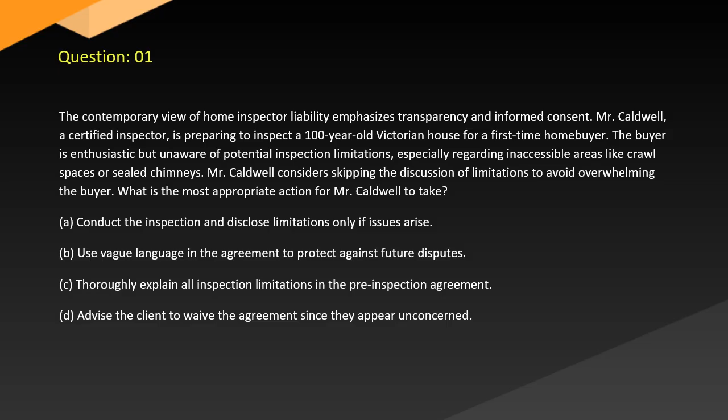Mr. Caldwell considers skipping the discussion of limitations to avoid overwhelming the buyer. What is the most appropriate action for Mr. Caldwell to take? A. Conduct the inspection and disclose limitations only if issues arise. B. Use vague language in the agreement to protect against future disputes. C. Thoroughly explain all inspection limitations in the pre-inspection agreement. D. Advise the client to waive the agreement since they appear unconcerned.

Answer: Correct answer C. Explanation: Home inspectors must clearly outline limitations in the pre-inspection agreement. ASHI-SOP Section 2. Transparency reduces liability and ensures informed client decisions. Avoiding or downplaying this step, even with enthusiastic clients, is unethical and could lead to legal disputes.

Courts often reject vague disclaimers or failure to communicate risks. See Interstate Home Inspections v. Jones 2020. Clients cannot waive protections unknowingly.

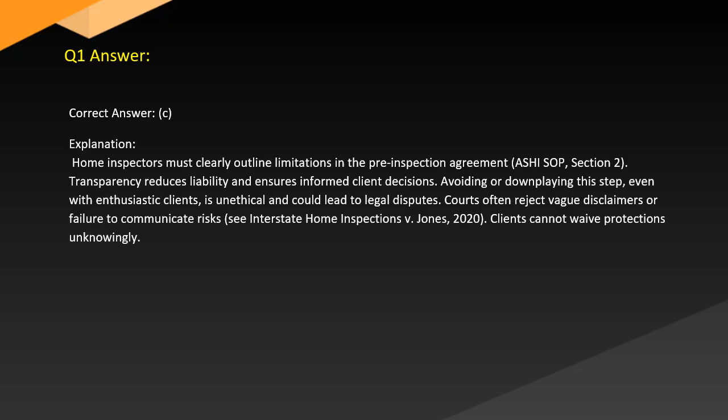Question 2. Upon closer examination, a home inspector finds an asphalt shingle roof with uneven wear patterns, curling shingles, and moss growth. Ventilation appears insufficient and the attic is unusually warm and moist. What is the most likely underlying issue contributing to premature roof deterioration?

A. Flashing failure near the chimney. B. Inadequate attic ventilation causing heat and moisture buildup. C. Improper slope causing water pooling. D. Overuse of roof cement during prior repairs.

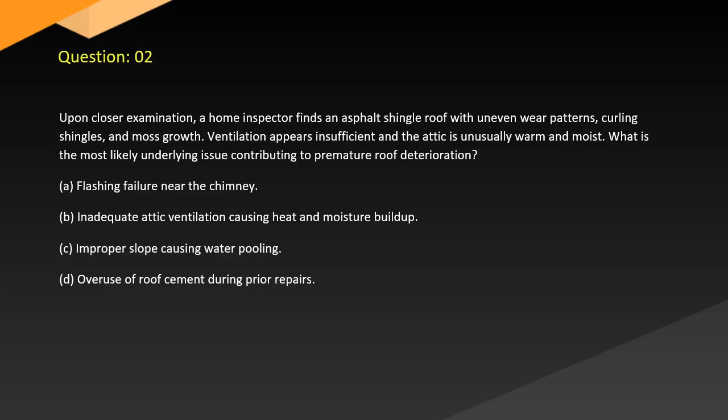Answer: Correct answer B. Explanation: Improper ventilation leads to heat and moisture retention in the attic, which damages shingles from beneath. According to the International Residential Code, proper ventilation is critical for roof longevity. Flashing or pitch issues cause leaks, but not widespread wear. Excessive moss is often a symptom, not the cause. Heat buildup accelerates aging of asphalt materials.

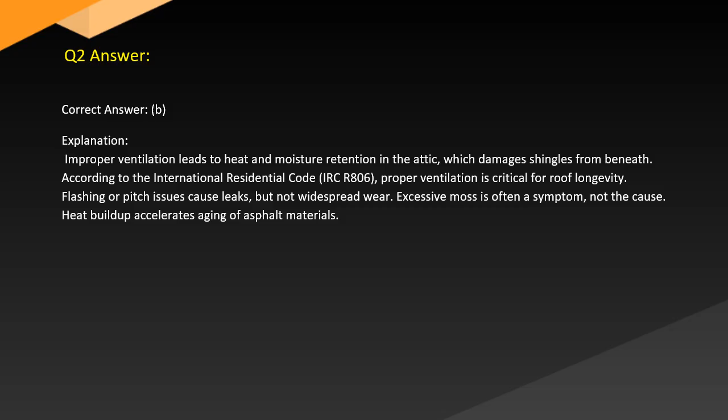Question 3. While examining a utility room, Inspector Lewis notices that the gas water heater lacks a temperature and pressure relief valve (TPR) discharge pipe. The client asks if this is a serious issue. What should Inspector Lewis explain?

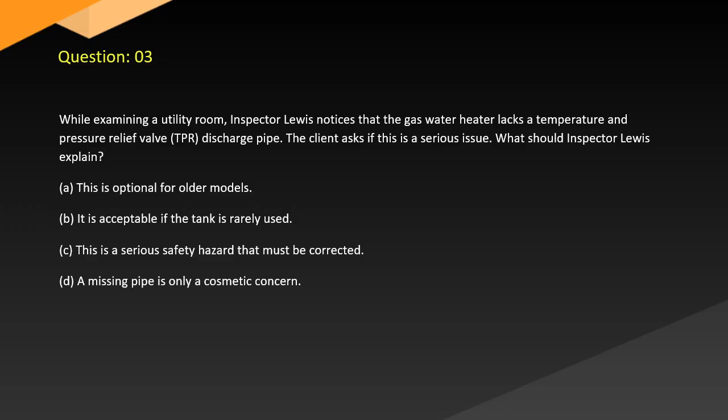A. This is optional for older models. B. It is acceptable if the tank is rarely used. C. This is a serious safety hazard that must be corrected. D. A missing pipe is only a cosmetic concern.

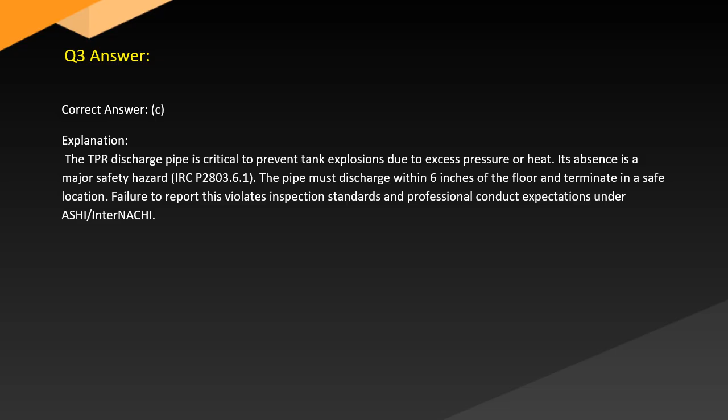Answer: Correct answer C. Explanation: The TPR discharge pipe is critical to prevent tank explosions due to excess pressure or heat. Its absence is a major safety hazard. Per code, the pipe must discharge within 6 inches of the floor and terminate in a safe location. Failure to report this violates inspection standards and professional conduct expectations under ASHI and InterNACHI.

Question 4. From multiple perspectives, horizontal cracking in a basement's concrete block foundation accompanied by inward bulging raises concerns. Inspector Patel suspects hydrostatic pressure. Which of the following should be included in his report?

A. Advise cosmetic repairs such as patching. B. Recommend immediate consultation with a structural engineer. C. Suggest regrading only and monitor annually. D. State that the foundation appears typical for its age.

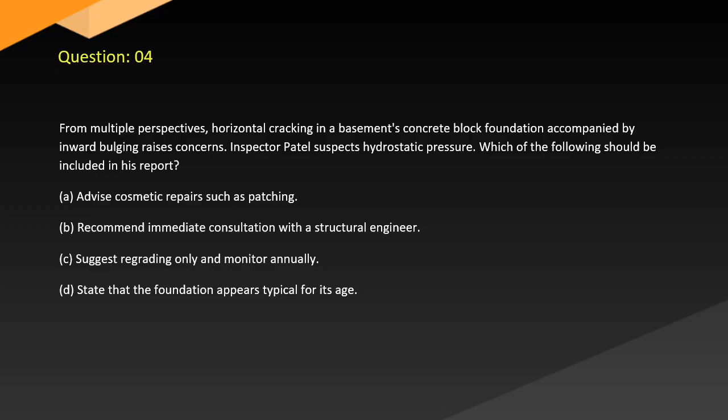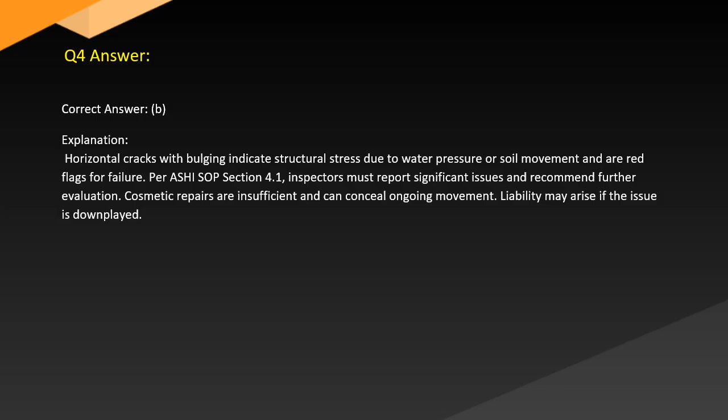Answer: Correct answer B. Explanation: Horizontal cracks with bulging indicate structural stress due to water, pressure, or soil movement and are red flags for failure. Per ASHI-SOP Section 4.1, inspectors must report significant issues and recommend further evaluation. Cosmetic repairs are insufficient and can conceal ongoing movement. Liability may arise if the issue is downplayed.

Question 5. To determine whether combustion appliances are functioning safely, Inspector Gomez tests carbon monoxide levels near a gas furnace. The levels are elevated despite visible blue flames. What does this suggest? A. The furnace is operating normally.

B. There may be incomplete combustion and poor venting. C. The blue flame ensures no CO is produced. D. Carbon monoxide alarms should not be relied on for testing.

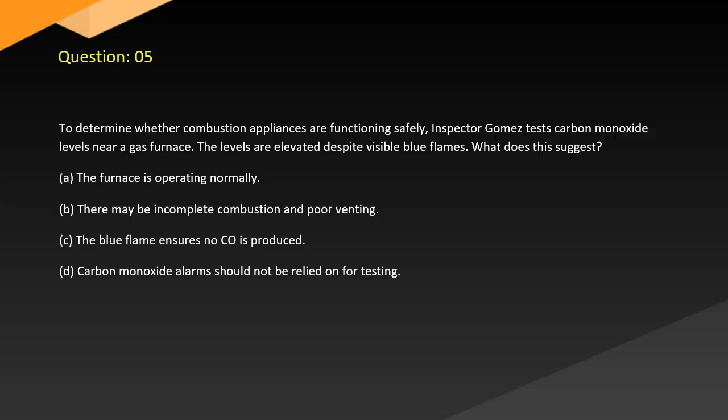Answer: Correct answer B. Explanation: Even blue flames can conceal incomplete combustion. Elevated CO suggests a malfunction or venting issue. According to the U.S. Consumer Product Safety Commission and the EPA, any level above 9 ppm indoors is concerning. Home inspectors must report suspected CO hazards and advise prompt servicing per ASHI Code of Ethics.

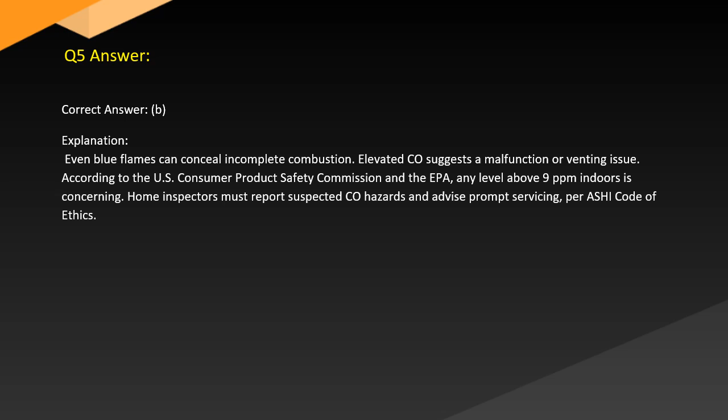Question 6. In the absence of visible cracks, Inspector Angela notes ponding water and reverse grading around the home's perimeter. What should she recommend to the client?

A. Since there are no cracks, no concern is warranted. B. Recommend regrading to slope soil away from the foundation. C. Install gutters only if flooding occurs. D. Monitor the area seasonally without immediate action.

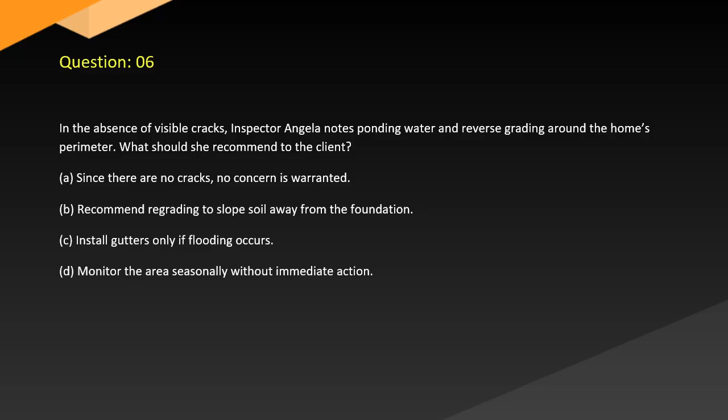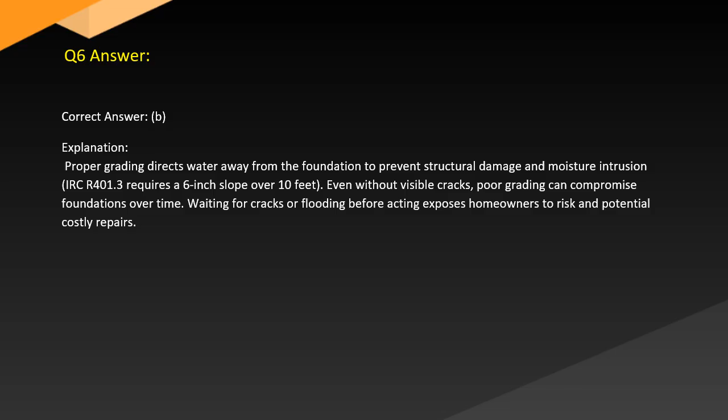Answer: Correct answer B. Explanation: Proper grading directs water away from the foundation to prevent structural damage and moisture intrusion. Code requires a 6-inch slope over 10 feet, even without visible cracks. Poor grading can compromise foundations over time. Waiting for cracks or flooding before acting exposes homeowners to risk and potential costly repairs.

Question 7. The fundamental question is whether Inspector Mehta breached his duty by failing to report a missing handrail on steep stairs, which later caused injury. The inspection report stated, 'stairs appear generally functional.' How might liability be assessed?

A. Inspector is not liable if injury occurred after inspection. B. Inspector met minimum reporting standards. C. Inspector may be liable for omitting clear safety hazard. D. No liability since client accepted the report.

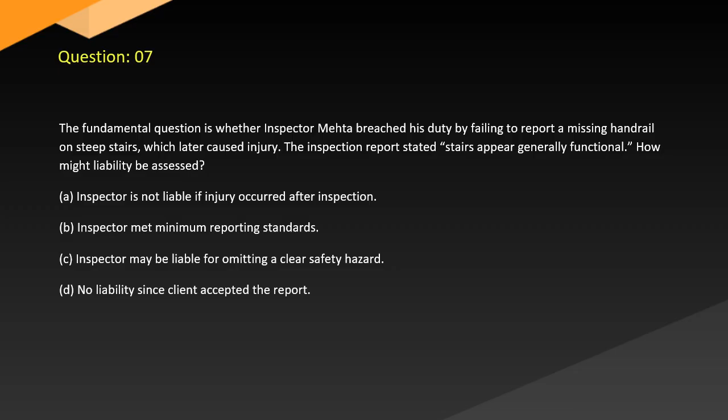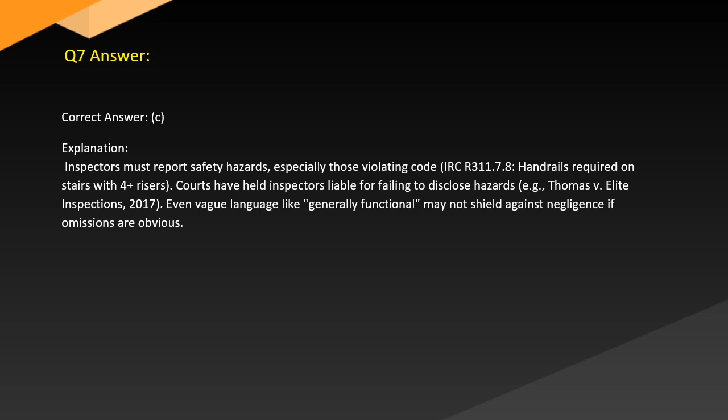Answer: C. Inspectors must report safety hazards, especially those violating code IRC R311.7.8, which requires handrails on stairs with 4 or more risers. Courts have held inspectors liable for failing to disclose hazards, e.g. Thomas v. Elite Inspections, 2017. Even vague language like 'generally functional' may not shield against negligence if omissions are obvious.

Question 8. Throughout the course of a panel inspection, Inspector Daniel observes double-tap breakers and mixed aluminum and copper wiring under the same terminal. What is the correct course of action?

A. Recommend a licensed electrician evaluate the panel. B. Ignore it if the panel shows no signs of overheating. C. Replace only the aluminum wires immediately. D. Tighten the connections and close the panel.

Answer: A. Double tapping can lead to overheating if breakers aren't rated for two wires. Mixing aluminum and copper can cause galvanic corrosion without proper connectors. NEC 110.14 requires compatibility in terminations. Only a licensed electrician should evaluate and correct such potentially hazardous installations. Ignoring them may pose fire risks.

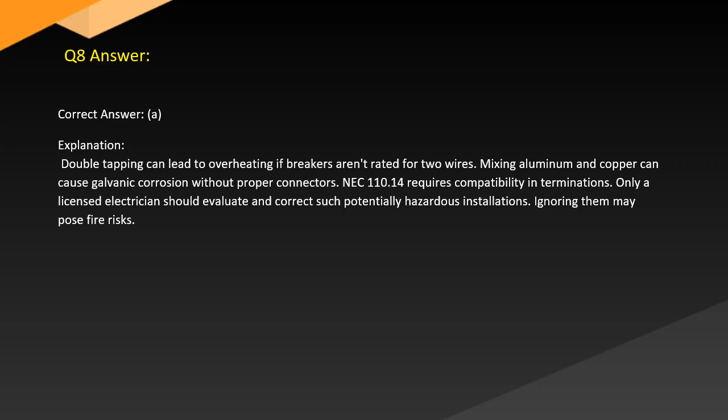Question 9. As evidenced by stained drywall, musty odor, and warped baseboards, Inspector Jordan suspects mold in a poorly ventilated bathroom. The client insists it's just age-related wear. What should Inspector Jordan do?

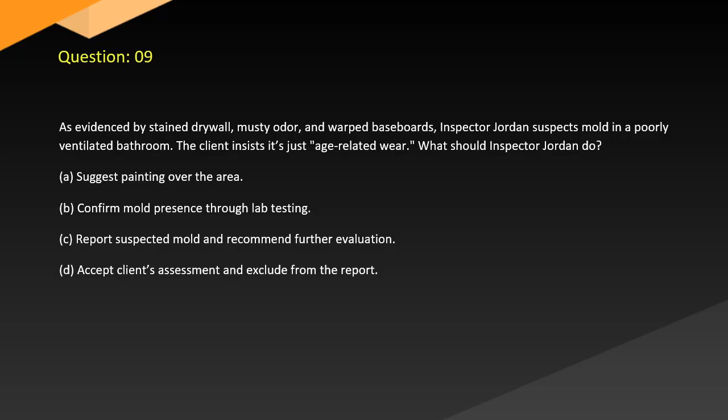A. Suggest painting over the area. B. Confirm mold presence through lab testing. C. Report suspected mold and recommend further evaluation. D. Accept client's assessment and exclude from the report.

Answer: C. Inspectors must report visible signs of potential mold and recommend further evaluation, per EPA Guidance and ASHI SOP Section 9. Testing is outside scope unless separately certified. Mold can cause serious health and structural issues. Suggesting cosmetic fixes violates ethical standards and may increase inspector liability.

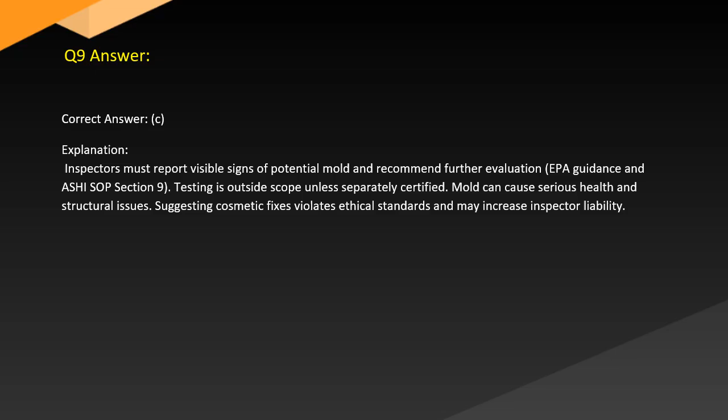Question 10. Given the circumstances of a newly remodeled kitchen, Inspector Lauren finds the garbage disposal is wired directly to a circuit with no switch or visible disconnect. The client asks if this is acceptable. What is the appropriate response?

A. Direct wiring is allowed if the unit is new. B. Disposal units can be wired without switches. C. Lack of a disconnect is a safety violation. D. It only matters if the unit is malfunctioning.

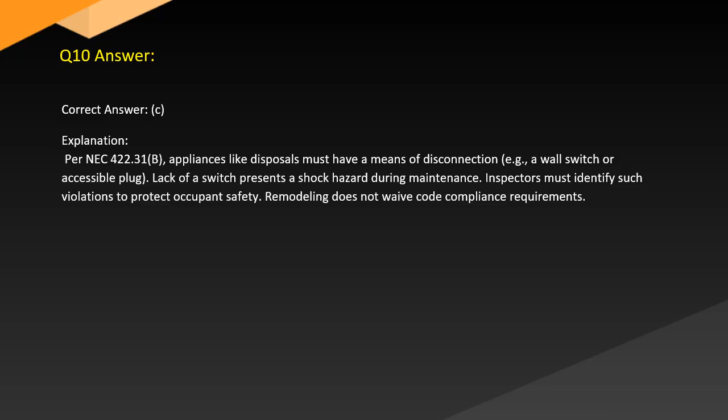Answer: C. Per NEC 422.31(B), appliances like disposals must have a means of disconnection, such as a wall switch or accessible plug. Lack of a switch presents a shock hazard during maintenance. Inspectors must identify such violations to protect occupant safety. Remodeling does not waive code compliance requirements.

Question 11. In a modern context of structural renovations, Inspector Wallace evaluates a home where several first-floor walls have been removed. The homeowner claims the renovation was done by a friend and no permits were pulled. Upon inspection, Wallace notices signs of floor sagging and unsupported beams in the basement directly beneath the removed walls. What is the most appropriate recommendation for Wallace to include in his report?

A. Suggest monitoring the area over the next few months. B. Note that cosmetic repairs may be necessary. C. Advise immediate evaluation by a qualified structural engineer. D. Recommend reinforcing the flooring with plywood.

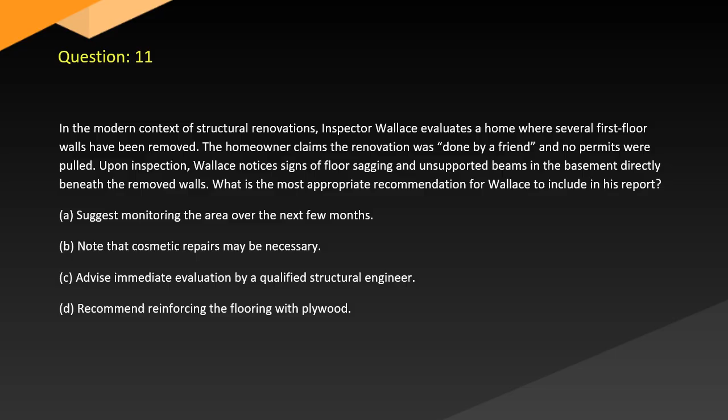Answer: C. Removal of load-bearing walls without proper engineering support is a serious structural concern. Floor sagging and unsupported beams suggest compromised integrity. ASHI requires inspectors to report conditions that significantly affect structural performance. IRC R301.1 mandates that load paths must be maintained. A structural engineer must assess this immediately; monitoring is not a substitute for professional evaluation.

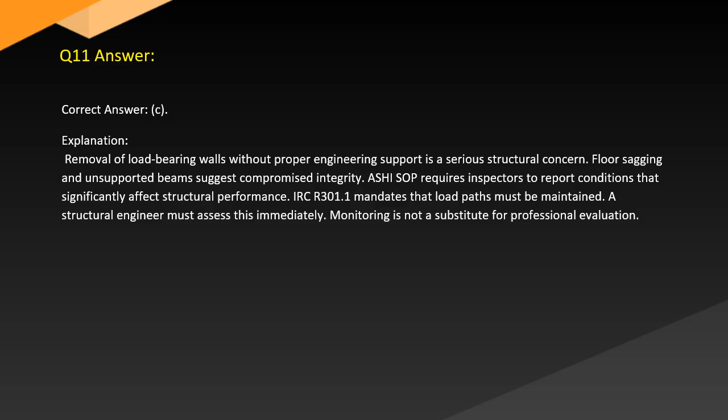Question 12. By evaluating a two-story home during a summer inspection, Inspector Tanya notes excessive heat in the attic and minor ceiling stains below. The attic has no visible soffit or ridge vents, and the bathroom exhaust fan vents directly into the attic. What is the most significant concern here?

A. Energy loss through ceiling insulation. B. Inefficient cooling of the living area. C. Risk of mold and moisture damage in the attic. D. Heat affecting the roof shingles.

Answer: C. Lack of proper attic ventilation and exhaust fan venting into the attic introduces excessive moisture, creating an ideal environment for mold growth and wood rot. IRC Section M1501.1 requires exhaust systems to discharge outdoors. ASHI obligates the inspector to report inadequate ventilation. Ceiling stains may indicate condensation-related damage, not leaks. This is a health and building integrity risk.

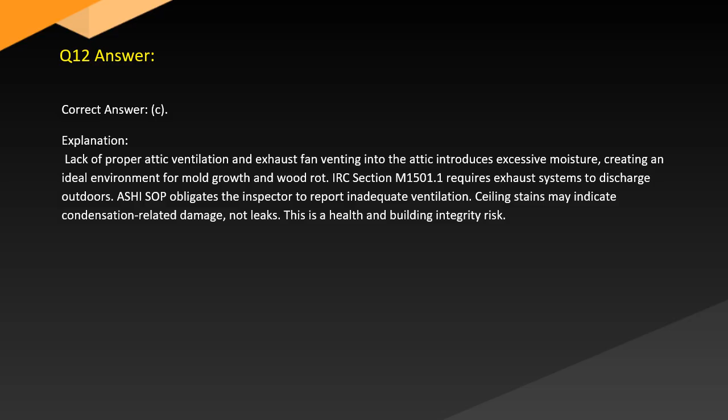Question 13. Contrary to popular belief, cracks in a brick veneer wall over a garage arch are not always cosmetic. Inspector Rena observes stair-step cracks extending upward from a garage door corner and separation between the veneer and window casing. The foundation appears stable, but the client asks if it's just normal settling.

What should Rena conclude in her report? A. Cracks are typical in all homes and not concerning. B. Recommend repointing the mortar only. C. Advise evaluation for structural shifting or lintel failure. D. Suggest repainting the area to conceal the defect.

Answer. Correct answer C. Explanation: Stair-step cracks and veneer separation may suggest underlying structural issues like lintel failure or shifting loads. Even without foundation issues, veneer cracking can reflect stress. ASHI requires noting visible defects that may indicate structural concerns; concealing the damage or labeling it normal without evaluation may breach professional responsibility.

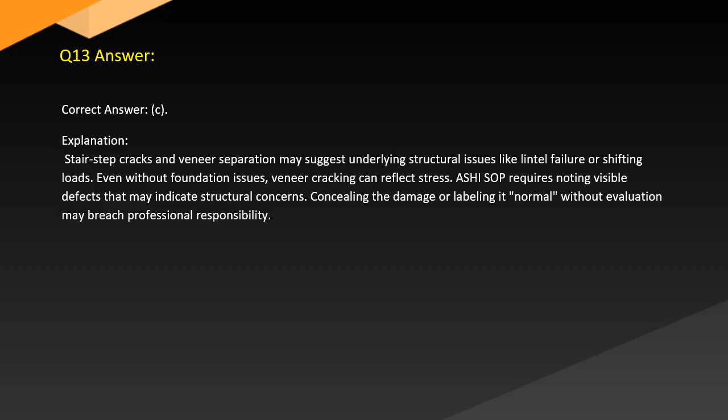Question 14. From a practical standpoint, Inspector Omar evaluates a masonry fireplace with white powdery residue on the exterior chimney and damaged mortar joints. The homeowner claims it's just dust from the bricks, but what does the residue most likely indicate, and what action should Omar recommend?

A. Efflorescence due to water penetration - recommend chimney inspection. B. Mold growth - recommend pressure washing. C. Paint flaking - suggest repainting the chimney. D. Normal discoloration with no further action required.

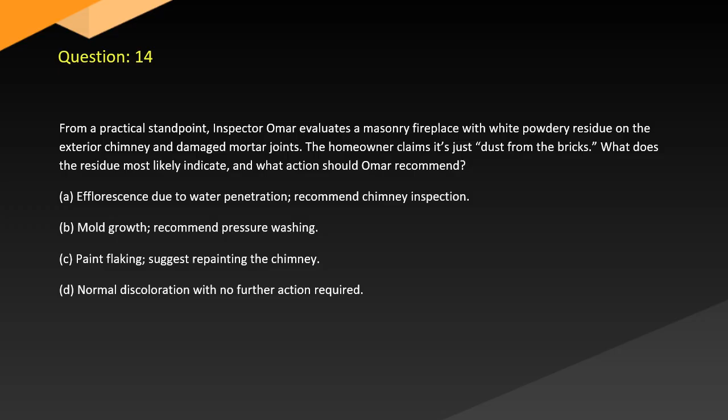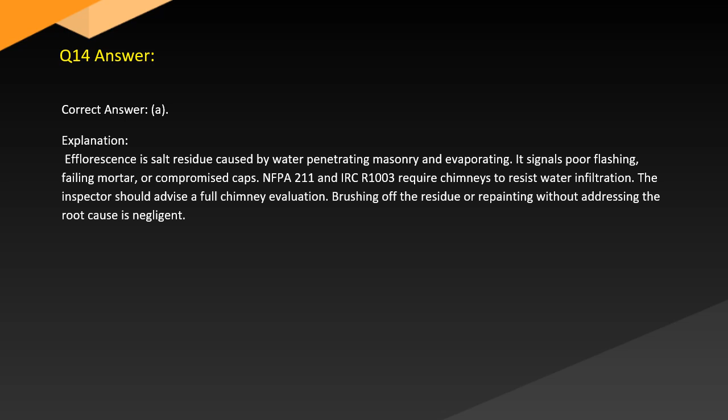Answer. Correct answer A. Explanation: Efflorescence is salt residue caused by water penetrating masonry and evaporating. It signals poor flashing, failing mortar, or compromised caps. NFPA 211 and IRC R1003 require chimneys to resist water infiltration. The inspector should advise a full chimney evaluation. Brushing off the residue or repainting without addressing the root cause is negligent.

Question 15. In response to a client request for infrared imaging, Inspector Grace explains she does not offer thermographic inspection but performs a visual-only inspection. The client insists on checking wall moisture. What is the best course of action for Grace?

A. Use a flashlight and guess based on visible signs. B. Offer to rent a camera to accommodate the client. C. Clarify limitations and refer to a specialized thermographer. D. Decline the inspection entirely.

Answer. Correct answer C. Explanation: ASHI requires inspectors to state the scope and limitations of their services clearly. If infrared or moisture detection tools aren't part of her standard practice, Grace must explain that and refer the client to someone with that expertise. Providing misleading information or guessing could create liability issues. Documentation is key to avoiding disputes.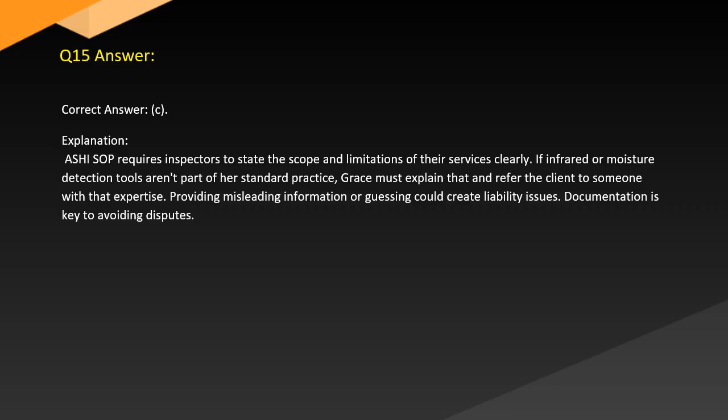Question 16. During the process of inspecting a finished basement, Inspector Naomi notes a damp odor, discoloration at baseboards, and minor drywall bubbling. The client mentions a previous water intrusion that was professionally dried. Naomi has no moisture meter.

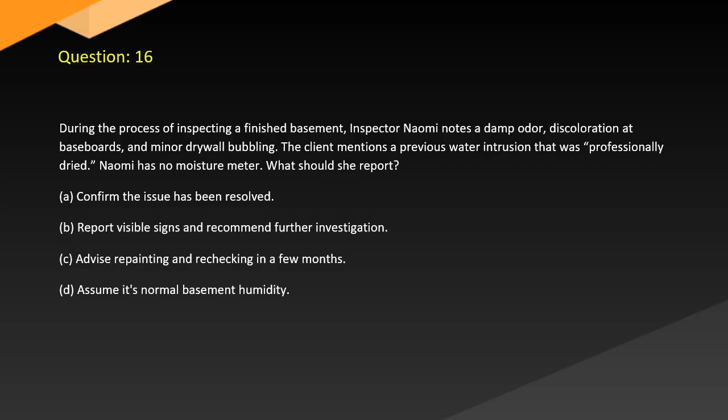What should she report? A. Confirm the issue has been resolved. B. Report visible signs and recommend further investigation. C. Advise repainting and rechecking in a few months. D. Assume it's normal basement humidity.

Answer. Correct answer B. Explanation: Even without a moisture meter, visible and olfactory signs like staining, bubbling, and odor warrant reporting. ASHI SOP directs inspectors to document observed conditions and recommend further evaluation where appropriate. Ignoring signs of past or ongoing moisture intrusion exposes clients to mold and health risks. It's inappropriate to confirm the issue is resolved without verification.

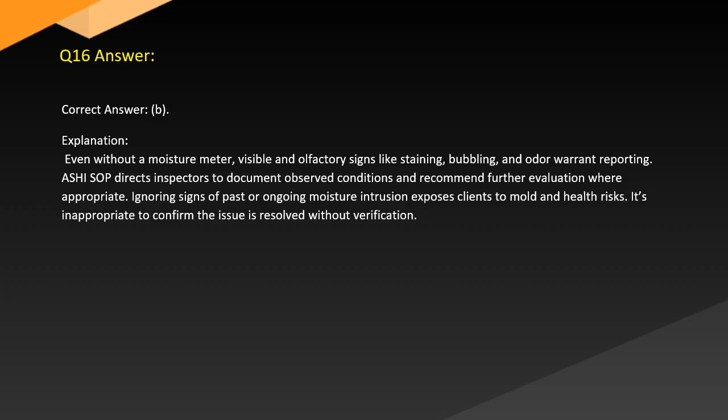Question 17. Across different scenarios, homes built before 1960 often lack grounded outlets. Inspector Allen finds multiple ungrounded three-prong outlets during an inspection of a 1958 home. What should Allen communicate in his report?

A. The outlets meet code for the time of construction and need no comment. B. Ungrounded three-prong outlets should be labeled and/or upgraded for safety. C. Recommend full rewiring of the house. D. No action is required unless devices malfunction.

Answer. Correct answer B. Explanation: Installing three-prong receptacles without proper grounding is misleading and unsafe. NEC 406.4D requires ungrounded three-prong outlets to be GFCI protected and labeled 'no equipment ground.' Inspector should recommend corrections for safety and code compliance. Full rewiring may not be necessary, but upgrading outlet safety is.

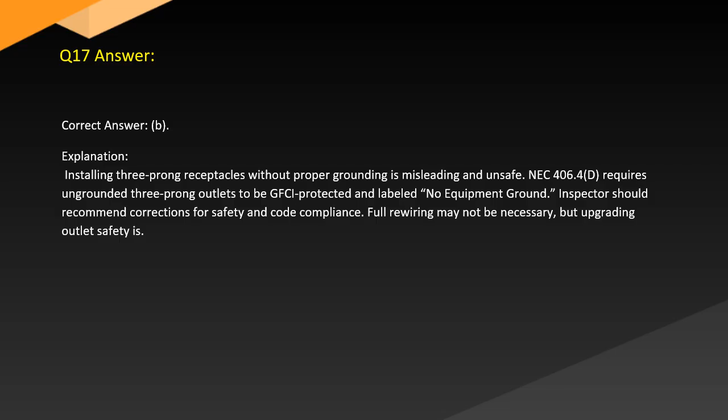Question 18. A critical examination of an in-ground pool reveals that there is no pool barrier or self-latching gate around the backyard. The homeowner says their area doesn't enforce pool safety laws. What is the appropriate inspector response?

A. Ignore it since it's not enforced locally. B. Report the lack of barrier as a significant safety hazard. C. Recommend signage instead of fencing. D. Suggest adding pool cover only.

Answer. Correct answer B. Explanation: Regardless of enforcement, inspectors must report life safety issues. The IRC Appendix G and many state laws require barriers and self-latching gates to prevent child drownings. A lack of a pool barrier is a major hazard. Pool covers are supplementary. Failing to report such risks could result in liability for the inspector in case of an incident.

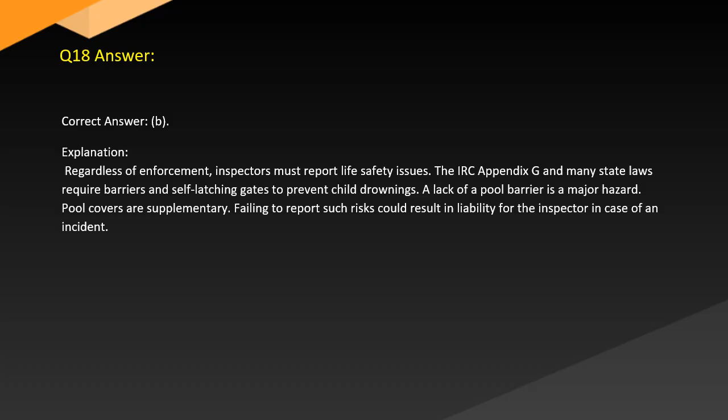Question 19. Through careful analysis of his own reports, Inspector Malik realizes he has been using templated language that may understate serious defects. For example, writing, "It appears serviceable," even when he suspects major repair is needed. What is the primary ethical issue involved?

A. Time-saving practices are encouraged in report writing. B. Clients should research the defects themselves. C. Understating issues can mislead clients and breach ethical standards. D. Using templates is prohibited by inspection standards.

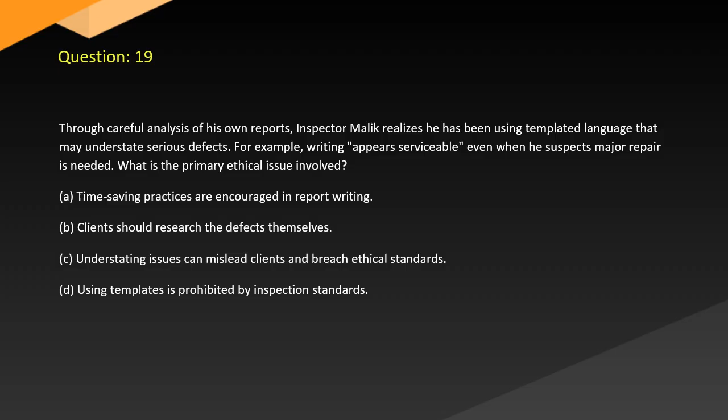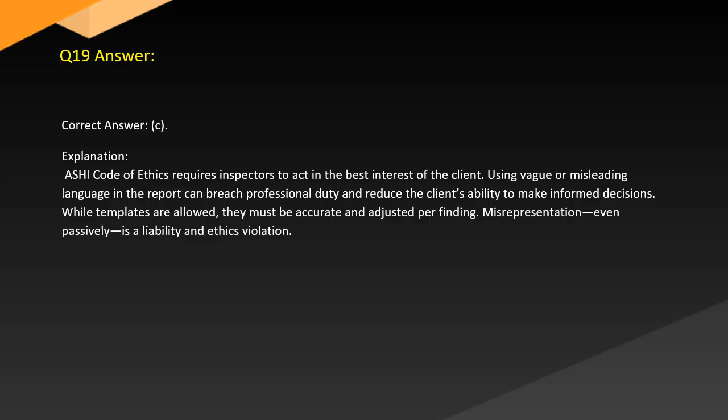Answer: Correct answer C. Explanation: ASHI Code of Ethics requires inspectors to act in the best interest of the client. Using vague or misleading language in the report can breach professional duty and reduce the client's ability to make informed decisions. While templates are allowed, they must be accurate and adjusted per finding. Misrepresentation, even passively, is a liability and ethics violation.

Question 20. In light of recent developments, Inspector George inspects a high-efficiency condensing furnace with PVC exhaust piping sloped slightly upward and secured with unapproved fasteners. What should George include in his report?

A. This is standard practice for high-efficiency systems. B. Report improper slope and recommend correction. C. Suggest annual furnace cleaning only. D. No issues since the system is operating.

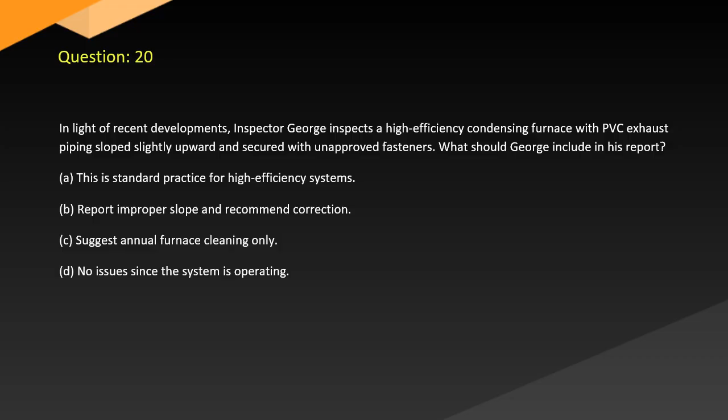Answer: Correct answer B. Explanation: Condensate in high-efficiency furnaces must drain properly. Exhaust pipes should slope downward toward the furnace per manufacturer guidelines and IRC M1411.3. Improper slope can lead to moisture buildup, backdraft, or corrosion. Improper fasteners can compromise pipe integrity. Operation alone does not confirm safe installation.

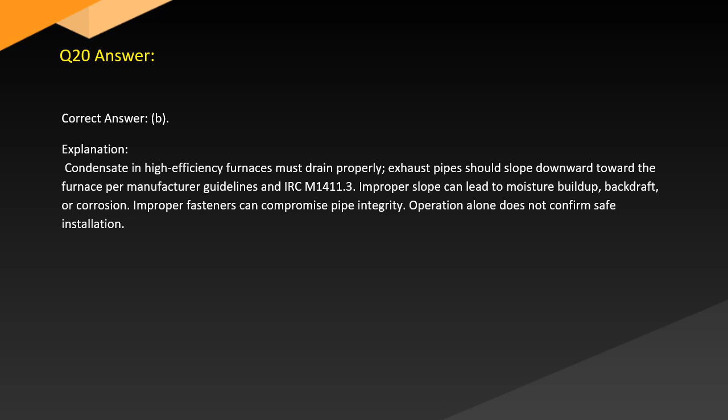Question 21. While it is true that some older homes do not have sump pumps, Inspector Bernard notices standing water in a basement corner and a sump pit without a functioning pump. The seller claims it's never been a problem even during storms. What is the best recommendation for Bernard to make in his report?

A. Suggest installing a backup battery system. B. Recommend replacing the sump pump and verifying functionality. C. Advise sealing the foundation wall. D. State that repairs are not necessary without current water.

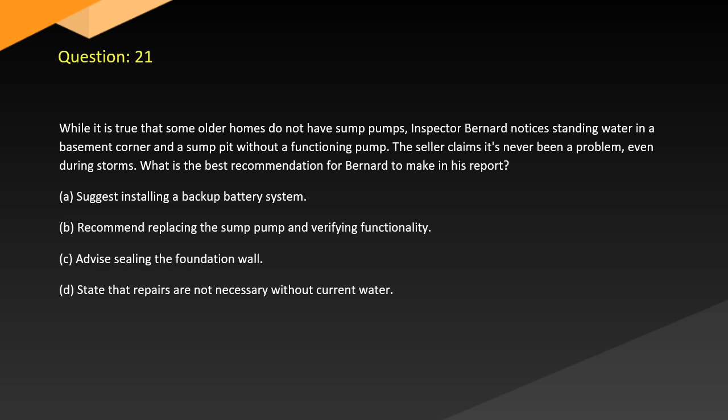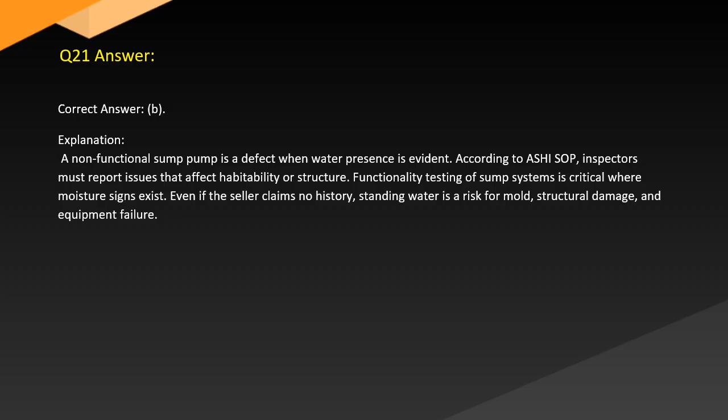Answer: Correct answer B. Explanation: A non-functional sump pump is a defect when water presence is evident. According to ASHI-SOP, inspectors must report issues that affect habitability or structure. Functionality testing of sump systems is critical where moisture signs exist, even if the seller claims no history. Standing water is a risk for mold, structural damage, and equipment failure.

Question 22. To illustrate this point, Inspector Sophia observes a detached garage with an electrical subpanel. The neutral and ground wires are bonded in the subpanel, and there's no separate ground rod. What should she note in the inspection report?

A. The setup is acceptable for detached structures. B. Neutral and ground must be bonded in all panels. C. Improper bonding and lack of grounding at subpanel are safety concerns. D. The lack of ground rod is fine if it's connected to the main panel.

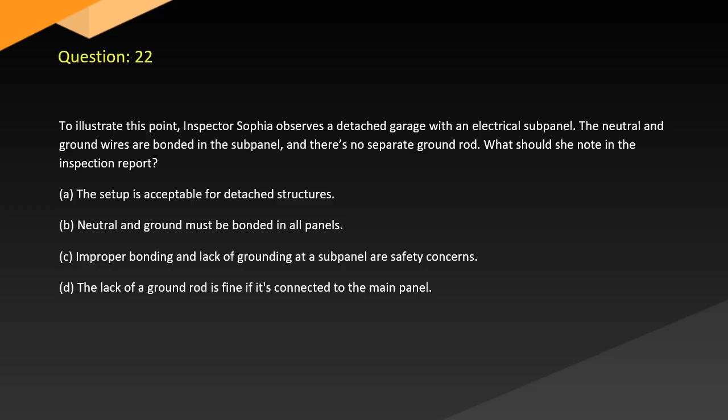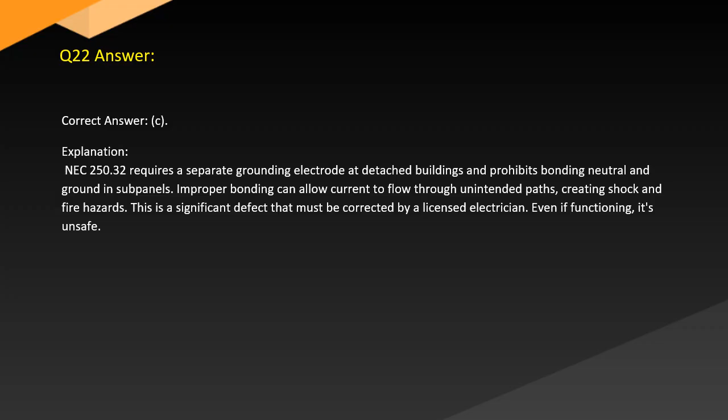Answer: Correct answer C. Explanation: NEC 250.32 requires a separate grounding electrode at detached buildings and prohibits bonding neutral and ground in subpanels. Improper bonding can allow current to flow through unintended paths, creating shock and fire hazards. This is a significant defect that must be corrected by a licensed electrician. Even if functioning, it's unsafe.

Question 23. Examining the consequences of improper siding installation, Inspector Jamie notices vinyl siding terminating below grade and visible signs of moisture damage near the base of the wall. The seller argues that's how it was originally installed. What is the most critical concern Jamie should report?

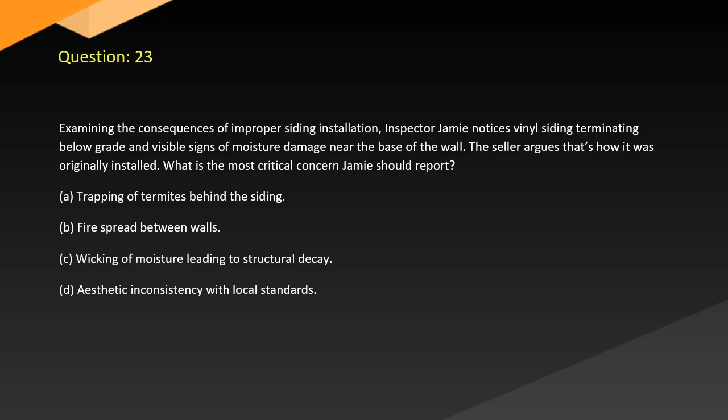A. Trapping of termites behind the siding. B. Fire spread between walls. C. Wicking of moisture leading to structural decay. D. Aesthetic inconsistency with local standards.

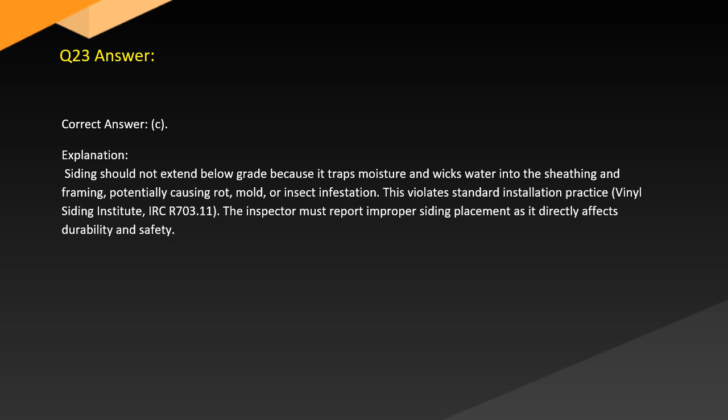Question 24. When analyzing a newly installed dishwasher, Inspector Carla notices that the drain hose lacks a high loop or air gap. The client says the plumber said it wasn't necessary. What should Carla include in the report?

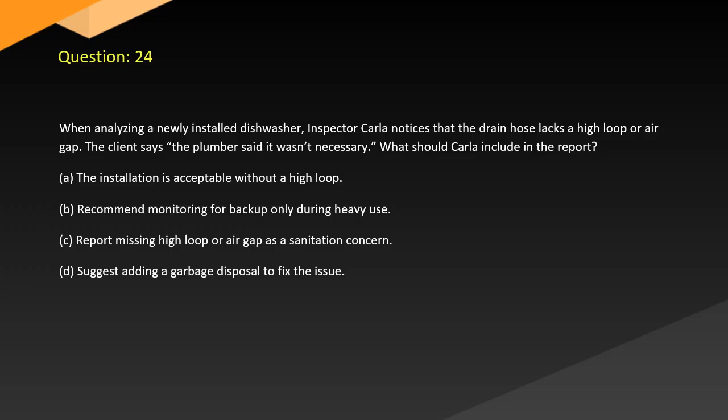A. The installation is acceptable without high loop. B. Recommend monitoring for backup only during heavy use. C. Report missing high loop or air gap as sanitation concern. D. Suggest adding garbage disposal to fix the issue.

Answer: Correct answer C. Explanation: Dishwasher drain lines must have a high loop or air gap to prevent backflow of contaminated water into the appliance, per IRC P2717.2, UPC 807.4. This is a cross-connection hazard. Carla must report it as a health risk. Manufacturer installation instructions often require a high loop regardless of local code.

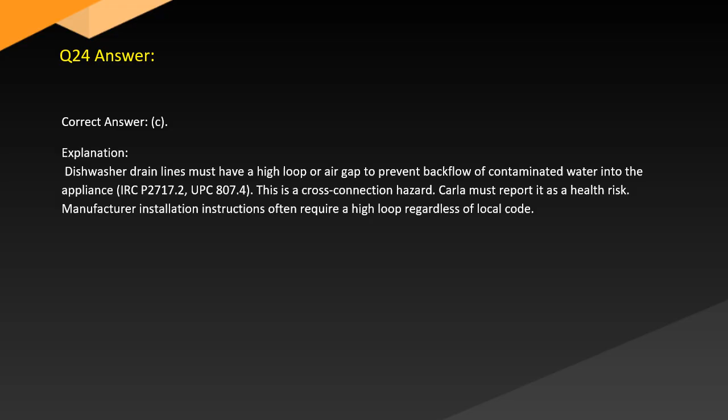Question 25. The correlation between wood soil contact and pest issues is often overlooked. Inspector Richard observes deck posts embedded directly into soil with no footing or visible barrier. What should he report?

A. This is typical and not considered a defect. B. Recommend pest inspection due to conducive conditions. C. Suggest cosmetic repair to cover the wood base. D. Report the condition only if pests are currently observed.

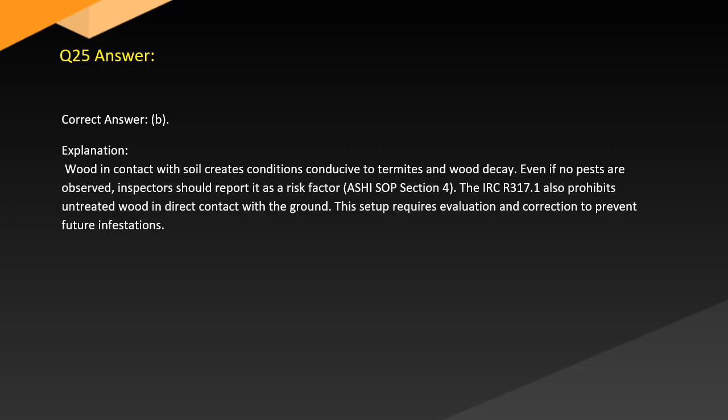Correct answer: B. Explanation: Wood in contact with soil creates conditions conducive to termites and wood decay. Even if no pests are observed, inspectors should report it as a risk factor. ASHI SOP Section 4. The IRC R317.1 also prohibits untreated wood in direct contact with the ground. This setup requires evaluation and correction to prevent future infestations.

Question 26. Based on the information gathered, Inspector Lauren observes that several windows in a newly renovated home show condensation between panes. The client asks if they are defective. What should Lauren explain?

A. This is normal for all double-pane windows. B. It indicates seal failure and the windows may need replacement. C. It only occurs due to seasonal humidity and is reversible. D. Recommend wiping the inner glass regularly.

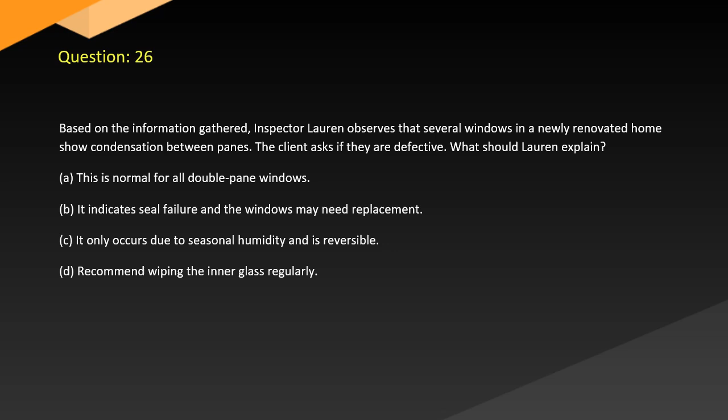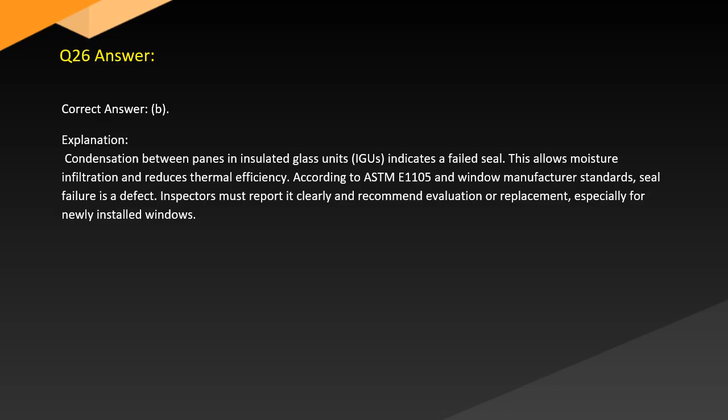Correct answer: B. Explanation: Condensation between panes in insulated glass units indicates a failed seal. This allows moisture infiltration and reduces thermal efficiency. According to ASTM E1105 and window manufacturer standards, seal failure is a defect. Inspectors must report it clearly and recommend evaluation or replacement, especially for newly installed windows.

Question 27. A key distinction between a home inspector's observations and contractor responsibilities is often misunderstood. Inspector Avery fails to note an obvious sagging roof and later learns the buyer is suing for damages. What is Avery most likely to be liable for?

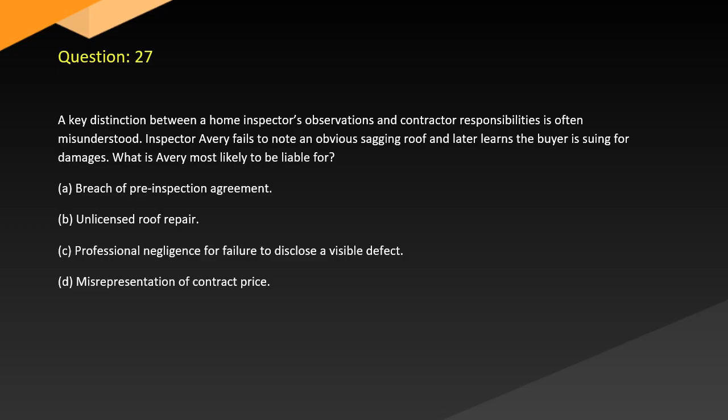A. Breach of pre-inspection agreement. B. Unlicensed roof repair. C. Professional negligence for failure to disclose visible defect. D. Misrepresentation of contract price.

Correct answer: C. Explanation: Inspectors can be held liable for professional negligence if they fail to report observable significant defects that fall within the scope of inspection. Even if the defect existed before or after the inspection, failure to disclose is a breach of duty. Courts often consider this omission of material fact, particularly under ASHI Code of Ethics and local liability statutes.

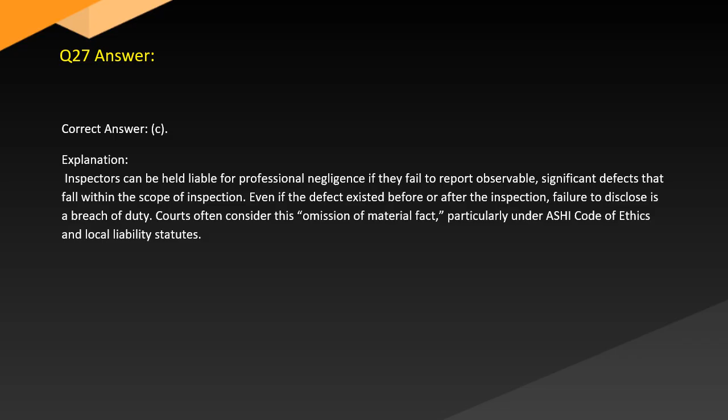Question 28. During the process of inspecting a sloped property, Inspector Felix notes a 6-foot-tall retaining wall leaning outward with soil pressure cracks and no visible weep holes. What should Felix include in the report?

A. No issues if the wall hasn't moved in recent years. B. Suggest cosmetic patching of cracks. C. Recommend engineering evaluation due to potential failure. D. Report the lean only if it exceeds 45 degrees.

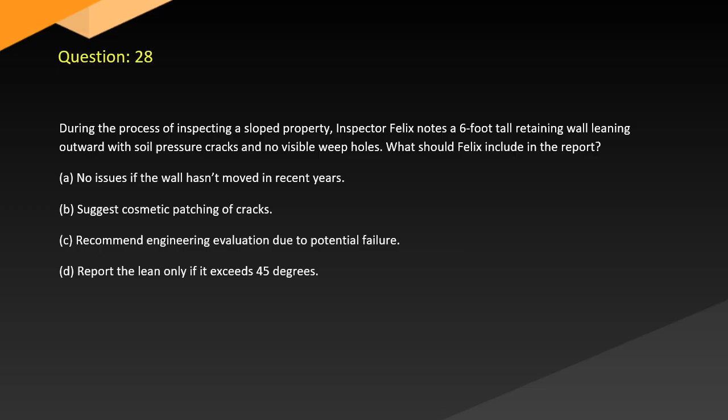Correct answer: C. Explanation: Leaning, cracking, and missing weep holes indicate structural stress in a retaining wall. Retaining walls over 4 feet typically require engineering per IRC R404.4. Inspector must report this as a serious concern. Failure to address could lead to collapse. Aesthetics are irrelevant compared to safety and load bearing stability.

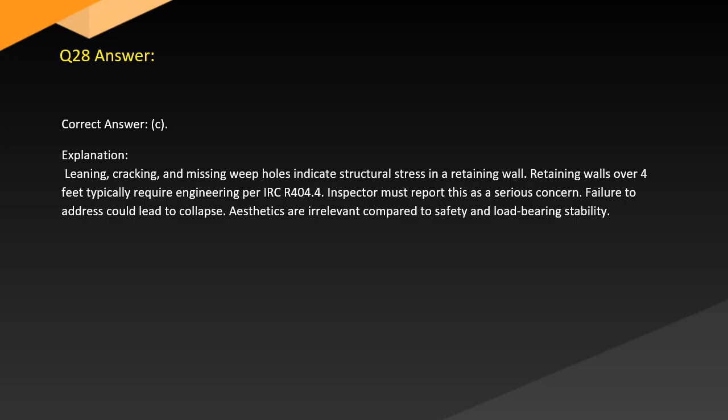Question 29. The underlying principle of home inspection is objectivity. Inspector Alina is offered a $300 bonus by a real estate agent if she downplays issues on a distressed property. What is the most ethical and professional course of action for Alina?

A. Accept the bonus and note the arrangement in the report. B. Decline the offer and report the agent to the licensing board. C. Accept the offer but continue to write an honest report. D. Politely decline and maintain full objectivity in the inspection.

Correct answer: D. Explanation: ASHI and InterNACHI codes of ethics prohibit accepting financial incentives from any party that may influence the report. The inspector must remain unbiased and loyal to the client. Accepting a bribe or incentive, even if reporting honestly, compromises professional credibility and may result in disciplinary action or license loss.

Question 30. From a historical standpoint, homes with enclosed utility rooms often lack combustion air. Inspector Nair evaluates a gas furnace and water heater in a sealed interior closet with no visible vents. What should she conclude?

A. The setup meets code for older homes. B. Lack of combustion air is a safety concern and should be reported. C. It's acceptable if the room is cool and dry. D. Only electric appliances require venting air.